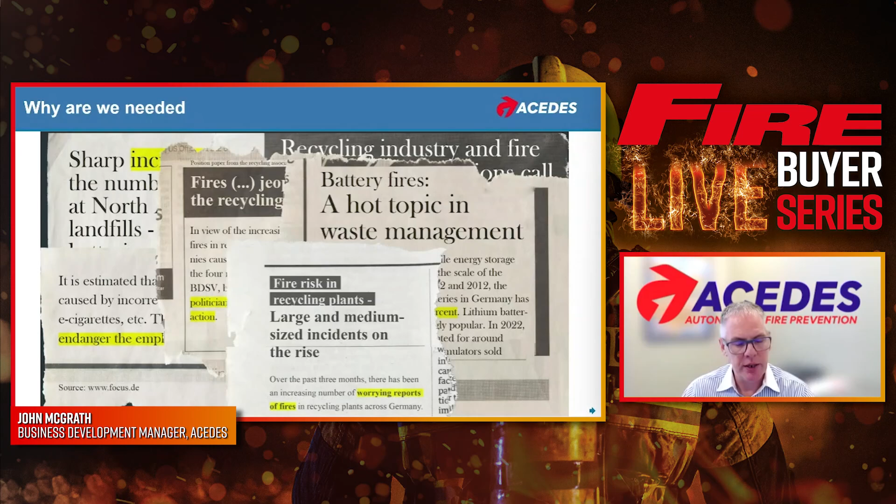So why are we needed? There's a definite market requirement for coupled systems, and it's based on the growing number of industry fires that we're seeing in waste management facilities. It's growing every year. We've got some figures that we got from waste360.com that show since 2018 there's been a continual growth, and it's growing at the rate of about 12 fires per year, or it has been. That rate does seem to be accelerating.

It's predominantly driven by the growing number of lithium-ion batteries that are disposed of in everyday trash from single-use vapes and various other sources. And the issue is that as loaders are moving the recycling material around, it's very easy to puncture these and they can instantly flare up, or they can sit at the bottom of a trash pile and very slowly start to heat up and create a hotspot, which eventually will become a flame.

And there's huge consequences, as I'm sure everyone is aware, to fires in waste recycling centres that can cause millions of dollars worth of damage, and also a loss of production capacity while the facility is repaired. So our objective is to stop those fires before they even become fires.

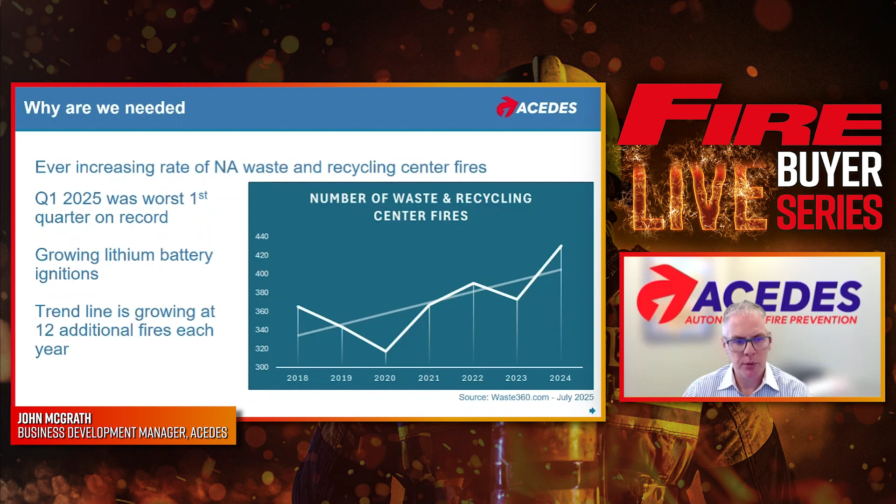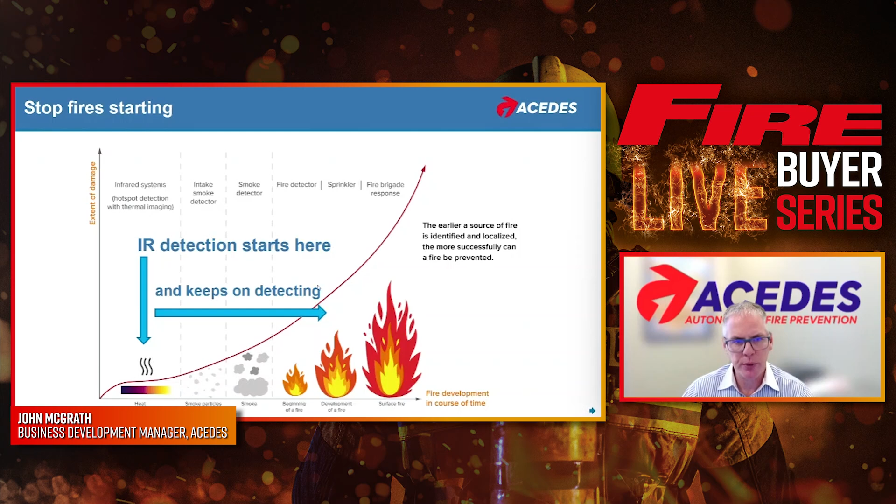So if you were using a flame detector, you wouldn't start to see any indication from it till here. Now, we're going to see it with our infrared detection much sooner, and we'll continue to see it all the way up till it becomes flame, so you don't lose the infrared advantage as you progress through this fire propagation cycle.

And the time frame can vary. If you puncture a lithium-ion cell, it might flare up immediately, but generally, if it's at the bottom of a pile of recycling material and it's just heating up, you can be tens of minutes easily before it eventually develops into a flame that you would be able to visually see, or a flame detector could spot. So the fact that we can detect much earlier on in the cycle means that we save a whole lot of time and a whole lot of damage in the process.

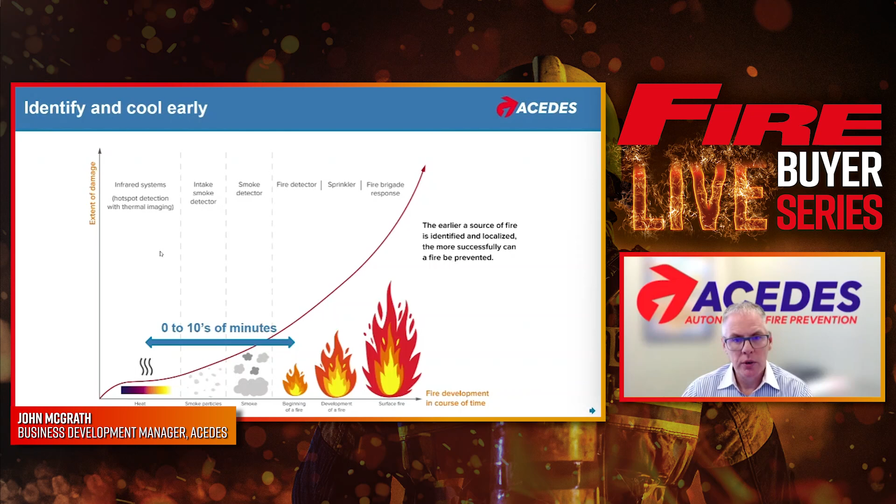So how does the system work? It's far easier to show you that in a video. So I'll play a video just now.

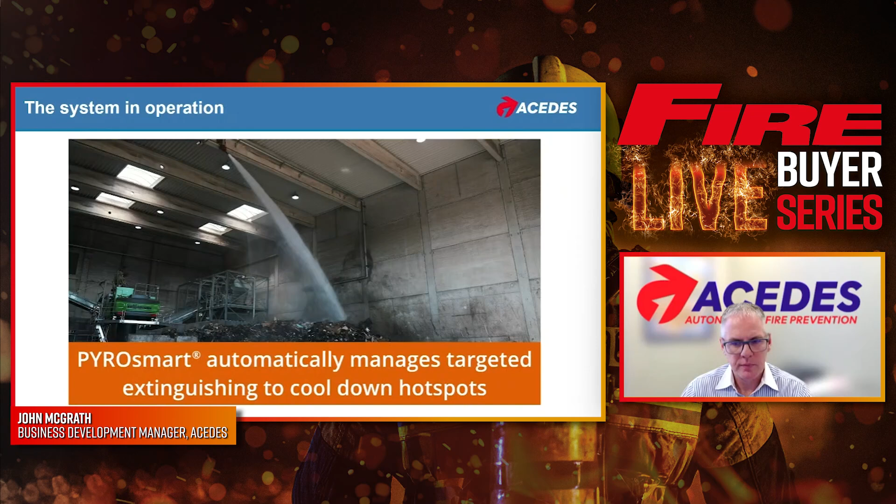So as you saw, we've got the PYROsmart Pro camera here. It has an infrared video camera in it, as well as a visual range camera in it, and that allows us to build up a 3D map of the area that's been surveyed, and we build a thermal display of that, and then we can overlay the video as part of that. The thermal display can sometimes be a bit confusing and unintuitive to read, but when you overlay it with a video, it makes perfect sense.

We then use that data to trigger any alarms, including pre-alarms, to give you a warning that something is about to happen, just in case there's some action you can take. We monitor everything online. Now, it's not a system that requires an external connection. All of this is housed within your facility. There's no third-party interaction required at all.

So once we've detected and determined that it's past thresholds that we need to act, we then control our fire monitors and we aim them in a 3D space. So we actually get the X, Y, and Z coordinates of where the hotspot is, and we aim the monitor accordingly. And then we also can hook up to your fire alarm control panel and send out appropriate warnings or alarms via that, as well as sending out messages and alerts to anyone within your organization so that they're aware of what's happening as well. So that's the overview of the system and the sort of stages that it would run through in a typical detection.

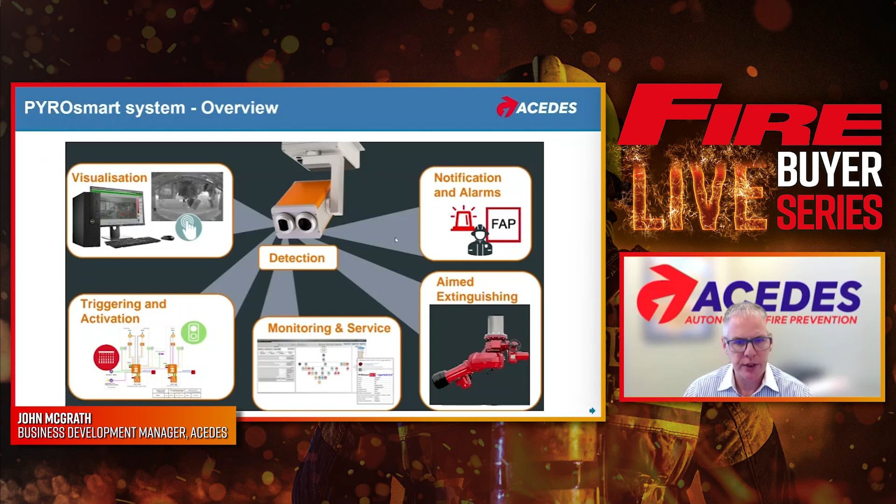So the advantage that this system gives, because it's pan and tilt and the camera moves backwards and forwards and then tilts and covers the whole area, we get a lot more resolution as opposed to having one or two or maybe even four fixed cameras with wide-angled lenses, which give a lot less resolution. With this system, in this hall here, you would need 32 fixed cameras to give you the same resolution as we have with this one. And you can see here.

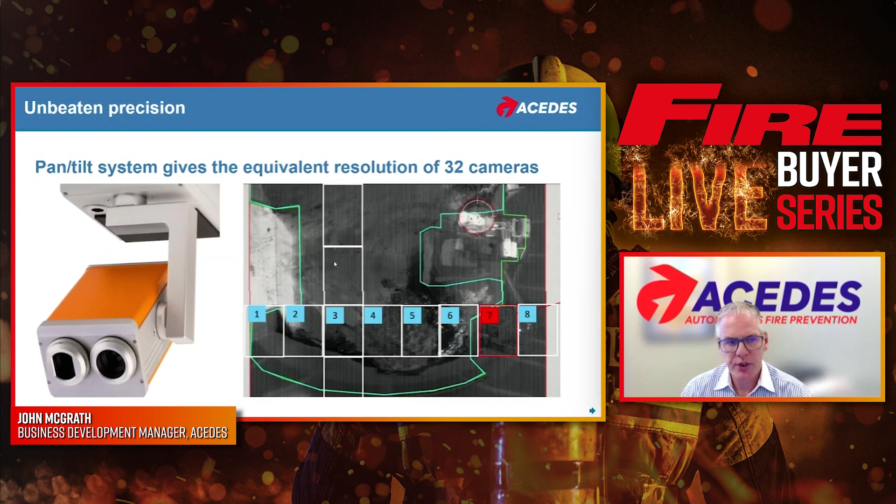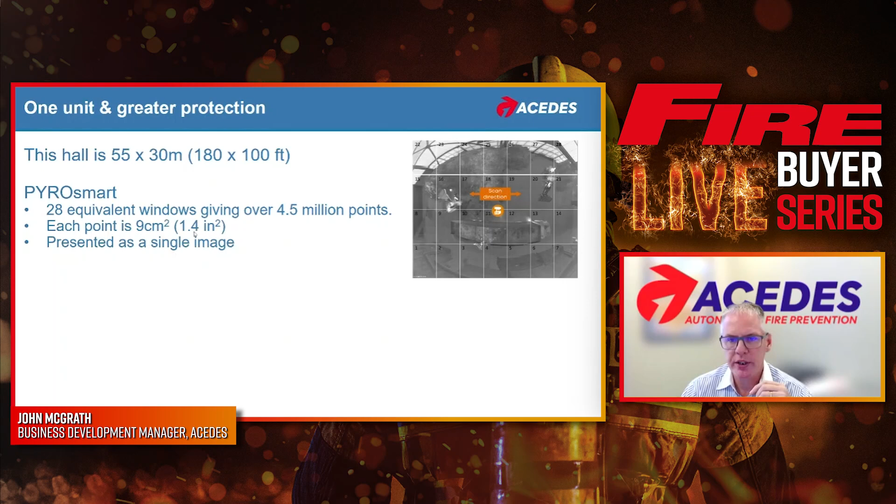To give you a more detailed example of it, we've got a facility here that is 180 feet by 100 feet. That's equivalent of 28 fixed cameras to give you the same resolution. And the resolution we are seeing, each pixel on our camera is equivalent of 1.4 square inches. So it's a very, very small area that we're resolving. We can take action on just a single pixel. So that's the type of resolution we're getting.

If you took the same facility and used 4 standard flame detector cameras or smoke detectors, they would best case give you a resolution of about 140 square inches. So we've got a 100 times greater resolution because we're using pan and tilt and building up the display of the facility. It normally takes us about 1 minute, maybe 1.5 minutes to scan a full room. We just do that continuously. So we're constantly updating the image.

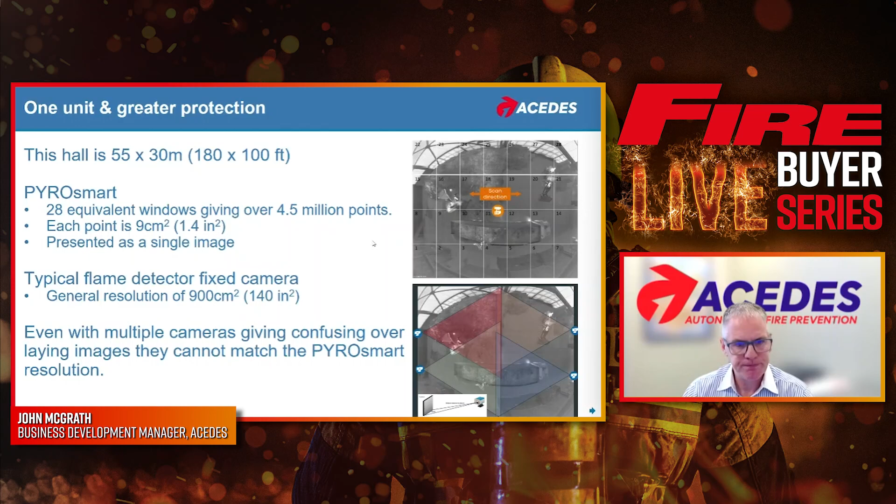Other things, reflections from sunlight will show up as hotspots. With a video camera, we can eliminate those. So there's a whole bunch of different things we use the video camera of the system for to augment and enhance the infrared part of it. And that's definitely one of the advantages of the system.

Then it's not just the fact that we're supplying 2 different cameras, it's the software and AI intelligence behind that runs through all the algorithms to make sure that when we activate, we're activating for a proper situation and not just a false alarm. False alarms take up time, they disrupt your operations, and we want to minimize those as much as possible.

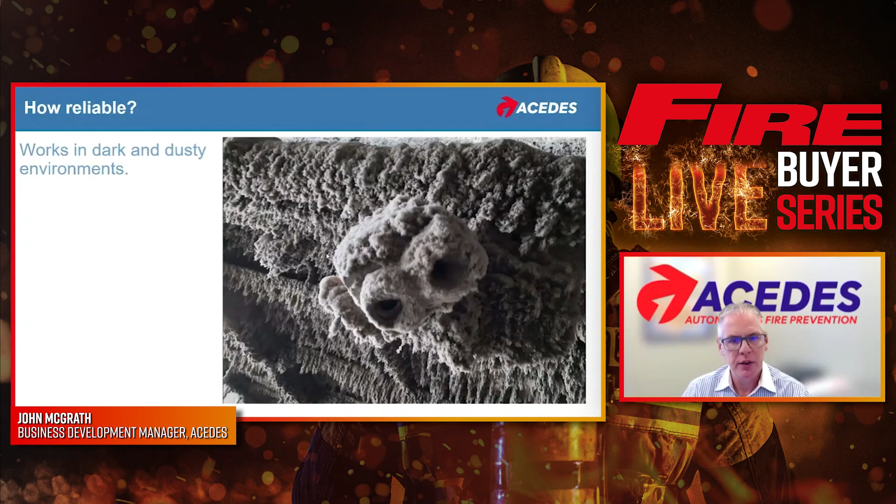So how reliable? Well, compared to a system of 3 or 4 fixed cameras, obviously with our system moving, that has to be a concern. What we have is we run a compressed air line to the system, so we're constantly blowing positive pressure air through the lenses to keep those clear, so we can work in dark and dusty environments. We manufacture our own gearboxes and motors for the system, so we can get a design life of 10 years out of them. So the system has no problem working in various environments. It's designed for those areas.

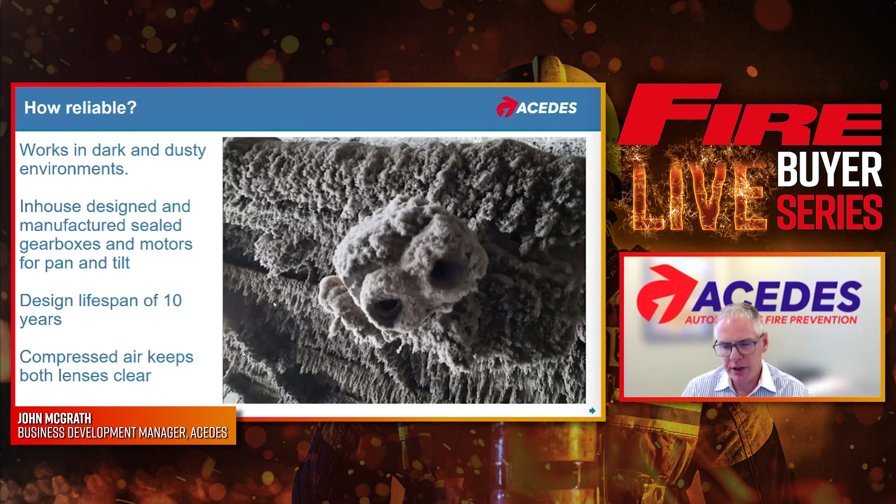We also have a whole range of systems that can be configured or optimized for whatever type of situation we're in. So it's not just a case of we have one particular system and we shoehorn it into whichever application you want. Whichever application you have, we'll have a system designed and optimized for that already. So that's all of that side.

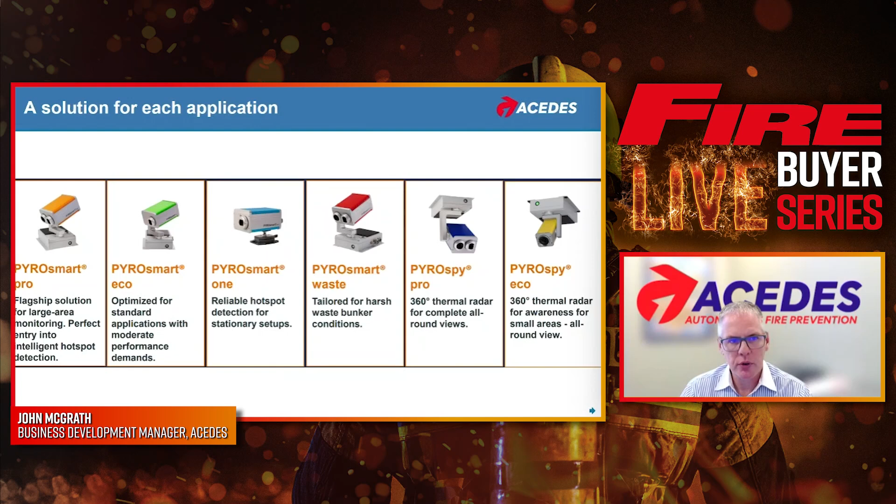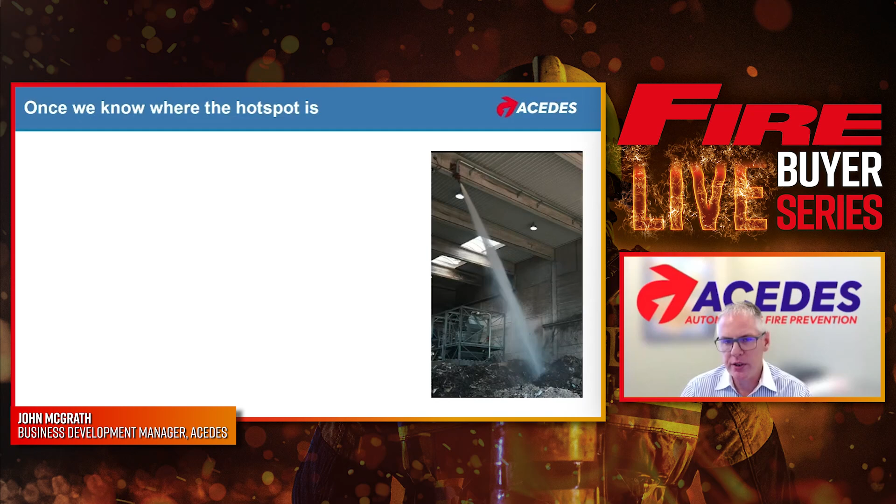So what do we do once the system has identified there's a hotspot and it has identified the X, Y, and Z coordinates of it? We send those coordinates to our monitor controller. That will then aim the monitor at that location in 3D space. So it's not just putting it down a particular vector, it will actually aim for a point in space. And then it will fire, it will open the solenoid valve to allow water to the monitor, and we'll cool that area with a pre-programmed pattern.

We don't just hit the center of the hotspot, because that has a risk of sending hot material outside the spray area. We actually start in one corner and work our way over it, and then we come back and forth several times to make sure the area is cooled. We can also include foam proportioners in here if you want to have a wetting agent or a foam, although that's pretty unusual for clients to do that.

While we're cooling, the PYROsmart is still scanning the rest of the facility, so you're always covered there. And then once the cooling cycle is complete, the PYROsmart will come back and check that area and make sure there's no residual heat there, and then go back to scanning the full facility. So you've still got 24/7 cover.

There's never a time where you fire the system, then it's down while you wait for material to be reloaded, or you've got to fill up a container or anything like that. The system is hooked into essentially your sprinkler main, so you've always got water available. You can use it multiple times a day if you require.

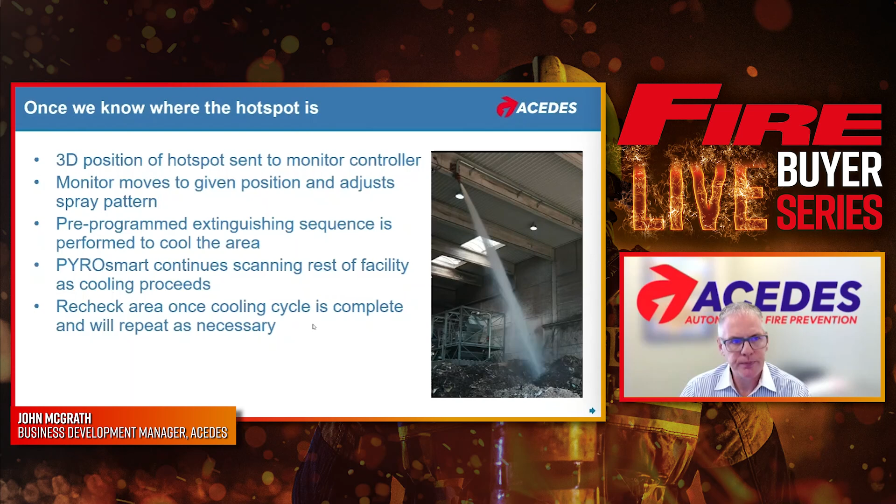So when manual control is needed, there may be times where, although it's automated and that's really good, you may just want to manually take over. That's not a problem at all. We have a portable remote control module that can control up to 4 monitors. As soon as you turn that on, it will connect wirelessly to the system, and it will take over from the autonomous control. So you instantly have manual control.

You can then aim the monitor, you can change the spray pattern, you can turn the flow on and off. And then once you're finished that, if you forget to turn the panel off, that's no problem. After 2 minutes of no action on the panel, the system will automatically revert back to autonomous control. So you're always covered.

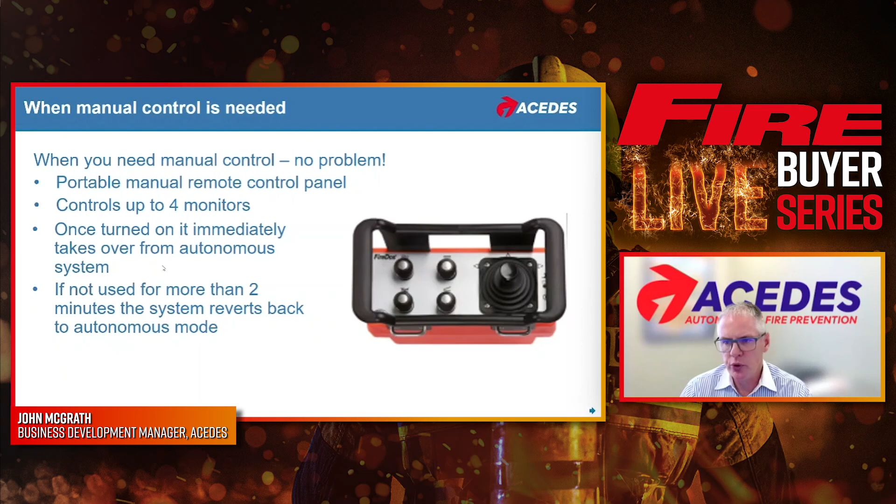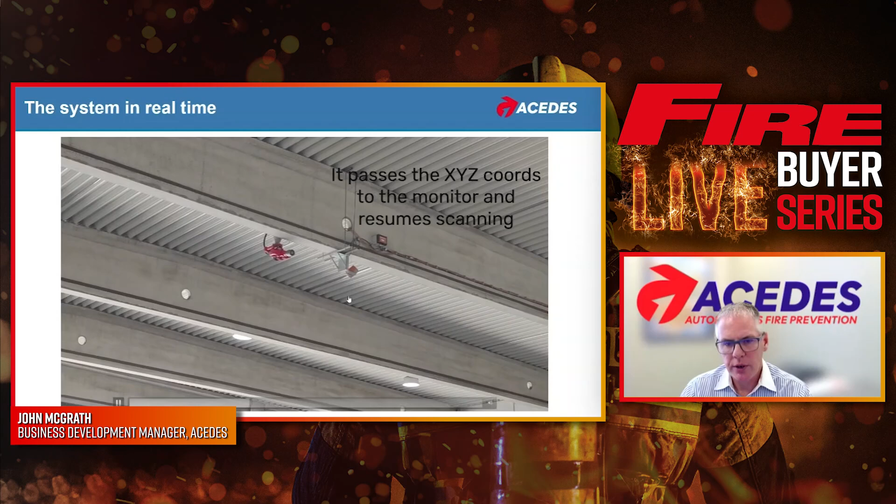It then checks to make sure it's not a false alarm, sends the 3D coordinates to the monitor, and then goes back to scanning. So you can see that's the PyroSmart scanning the rest of the hall while the monitor is now activated. So you're normally looking at around 10 to 20 seconds from detecting a hotspot till the monitor's on location, and you'll see it now.

And that's it, going over a grid pattern over the area where the hotspot was detected. And you can see we can cover very large areas with one system.

So where is it used? We work in a number of different industries. Material recycling, MRFs are very popular for us, the pulp and paper industry, various waste treatment facilities, transfer stations are a very common application for us, as well as wood processing and some forest management. If you're going to have materials sitting outside for some time and there's a risk of fire there, we can do that. Although the applications I have shown have pretty much all been indoors, the system works outdoors.

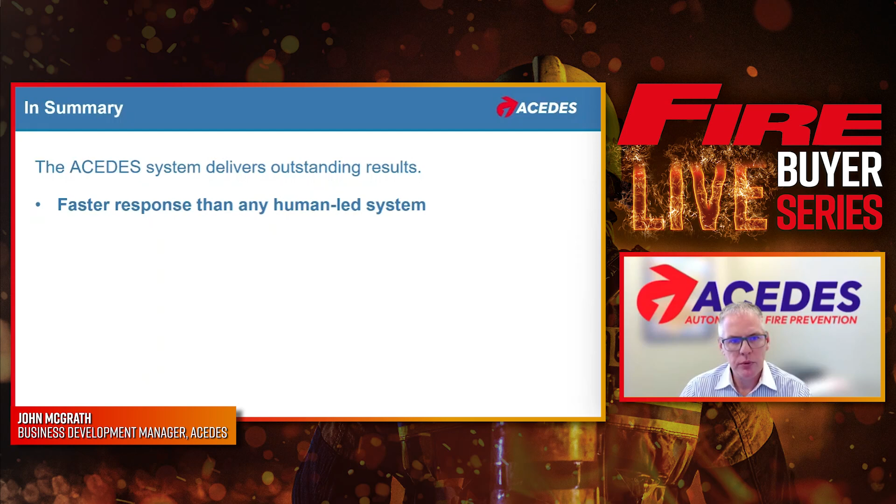So we're not going through all the detection, then sending out a signal to a remote human somewhere, and then relying on them coming online, checking the system, and then aiming it. It will do all of that automatically, far faster. It will also send out the alerts so that us humans are aware of what's happening, but we won't be the bottleneck.

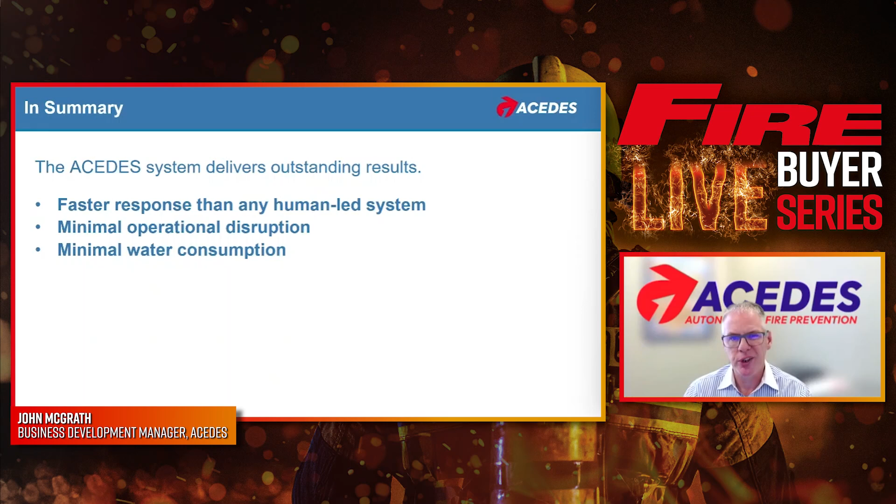Because we're detecting much earlier and taking action much earlier in the fire propagation cycle, we have a lot less interruption to your operations. It takes a lot less water to cool a hotspot as opposed to extinguish a fire. So both of those really help. That makes it ideal for any high-risk environments, especially if there is a risk of lithium-ion batteries being present. So we work really well in those environments.

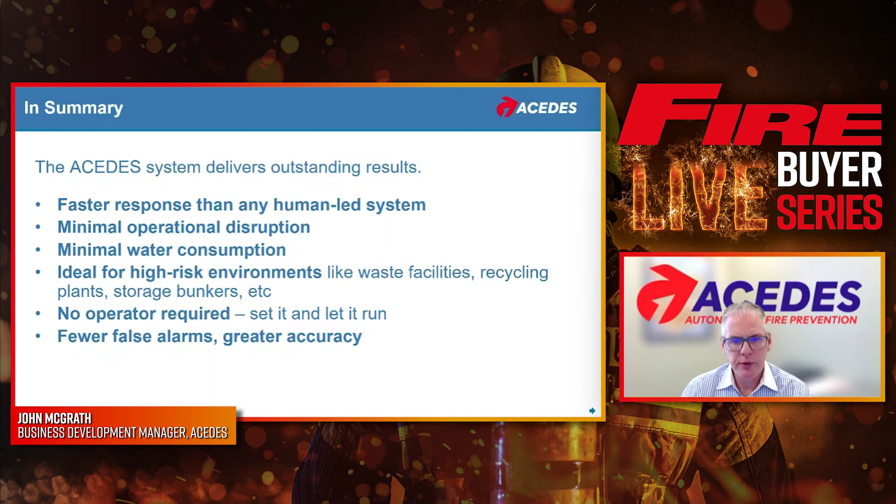We don't require any intervention from your personnel day to day, hour to hour. You just set it and it runs. As I said earlier, you can take over at any point. That's no problem, but it will just continually run. And with that, you have fewer false alarms and greater accuracy. False alarms will just leave people frustrated with the system, and there's a likelihood they'll start to try and circumvent it. We don't want that at all. So the system with the false alarm detection is absolutely critical.

And that's everything I have for you. Thank you for your attention.

Well, thanks, John, for that presentation. It's very interesting. And as you explained in the beginning of your presentation, obviously there's a growing need for this with lithium batteries being used more and more in everyday life, and then obviously being in recycling plants. First thing I wanted to ask you was, what are the sort of regulations for these sort of situations in terms of having fire protection systems? Is it mandatory for them to have them?

It's not mandatory to have this level of fire protection. A general sprinkler system is all that is generally required, and our system certainly doesn't necessarily remove the requirement for a sprinkler system. Sprinkler system is a full building, a full facility fire suppression system. So if something got completely out of hand, one monitor on its own probably wouldn't be able to do it. So you still need to have your fire suppression, generally a sprinkler or some sort of other deluge system in place. What we're in there for is to prevent it ever getting to that stage.